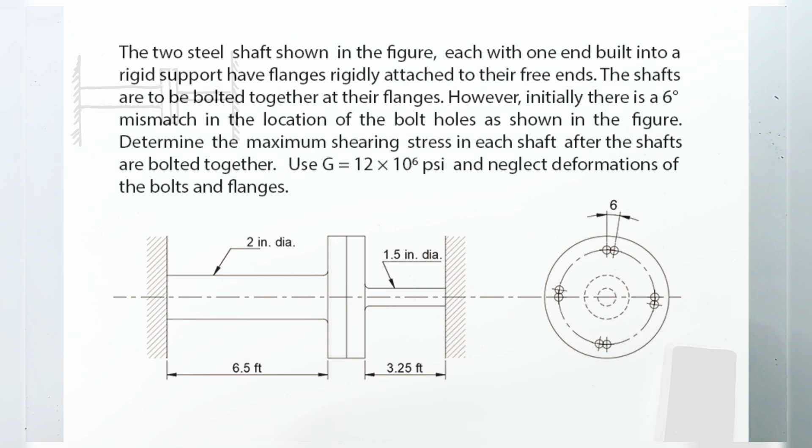So if we're going to bolt these two shafts together, then they have to be twisted in opposite directions so that the holes will match and we can insert the bolts. Because of this twisting, there will be torque developed in the shaft, and it will be resisted by the bolts.

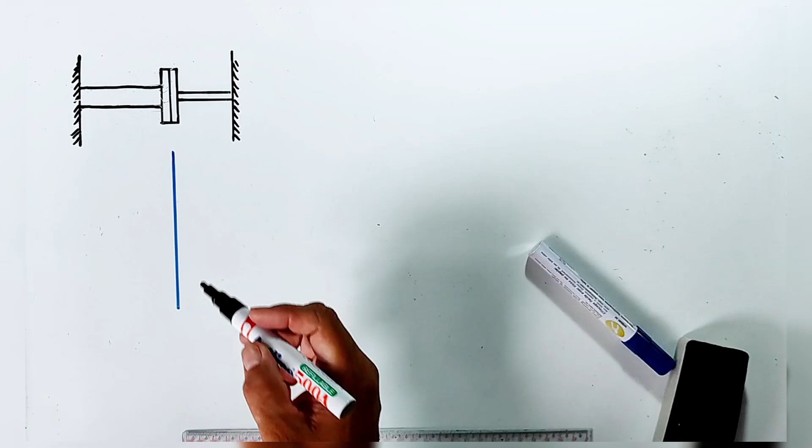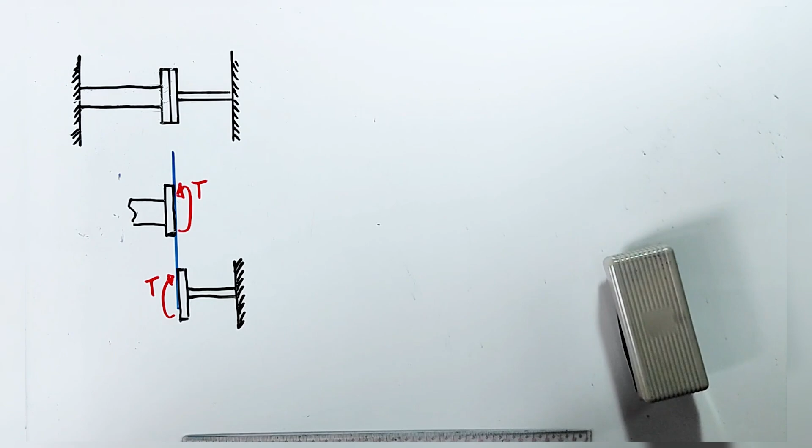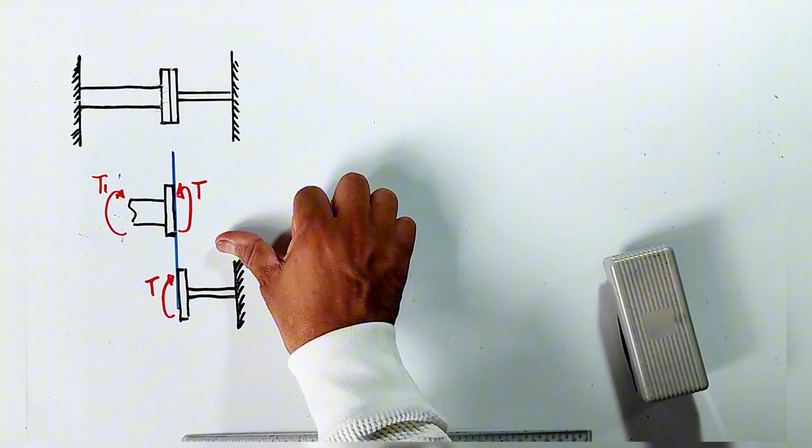Okay, if we are going to draw the free body diagram of each shaft, there will be a torque to be resisted by the bolts. Let's call this torque T, and that torque T is the same here. If we cut a section here, the torque will be resisted by the shaft. Let's call this shaft 1, with resisting torque T sub 1. If we do the same on the right side and cut a section there, there's a resisting torque T sub 2. So from this, we can say T sub 1 equals T, and T equals T sub 2. Therefore, T sub 1 equals T sub 2 equals T. So we'll just use T as the resisting torque for each shaft.

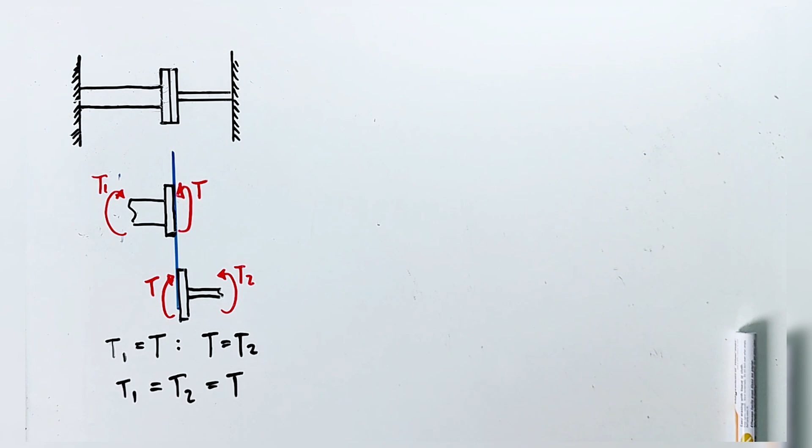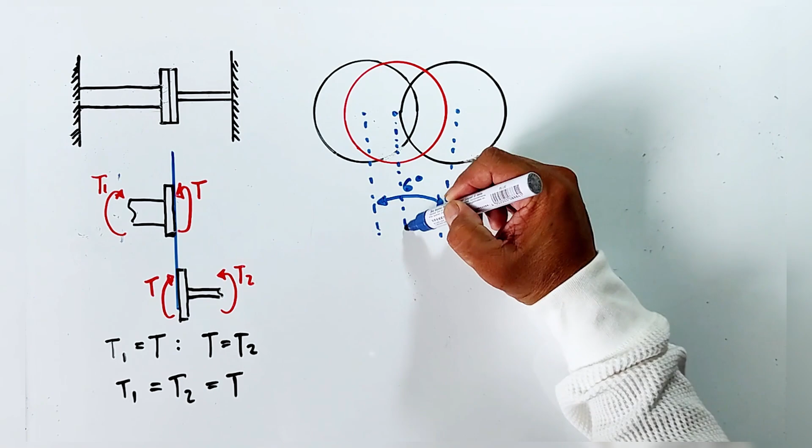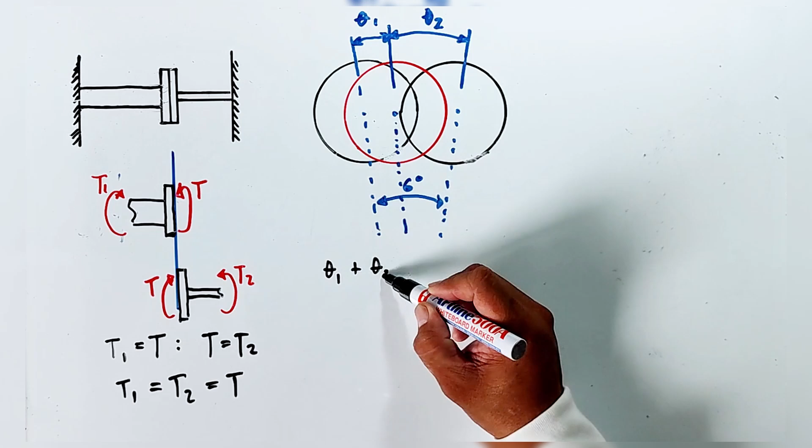Now considering the twisting of the shaft, let's say these are the bolt holes, not the shaft, these are the bolt holes. So there's a 6-degree mismatch. After being bolted, let's say the red one is the final position of the two bolt holes. So the movement from here to here will be the angle of twist of one of the shafts. Let's say this is the angle of twist for the second shaft, while this one is the angle of twist of the first shaft. So from the illustration, we can say that the angle of twist of the left shaft plus the angle of twist of the right shaft is equal to 6 degrees.

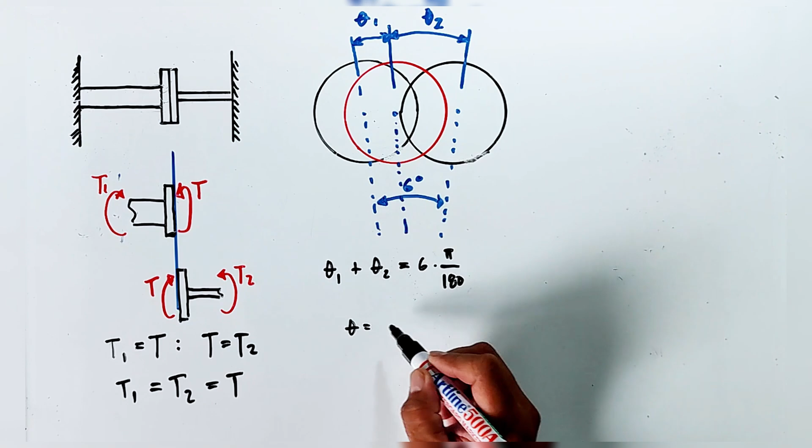And to change that to radians, we'll multiply by pi over 180. So from the formula, angle of twist equals TL over JG.

For theta 1, that will be T times L1, which is 6.5 feet. Converting that to inches, we multiply by 12, divided by pi times d to the fourth over 32 for J, pi times diameter, which is 2 to the fourth power, divided by 32, divided by 12 times 10 to the 6. Plus theta 2, again we'll just use T because they're equal, T times the length of 3.25 times 12, divided by pi d to the fourth, that's 1.5 to the fourth, over 32, divided by 12 times 10 to the 6, equals 6 pi over 180, which is pi over 30.

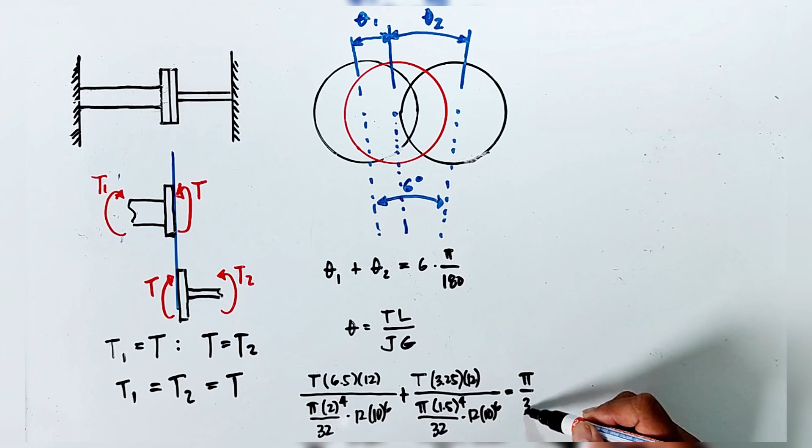So T equals pi over 30 divided by the quantity: the first term is 6.5 times 12, divided by pi, divided by the diameter to the fourth power, that's 2 to the fourth power, divided by 12 times 10 to the 6, then multiplied by 32. Plus the second term is 3.25, converted to inches, times 12, divided by J, that's pi, divided by 1.5 to the fourth power, divided by G, 12 times 10 to the 6, times 32.

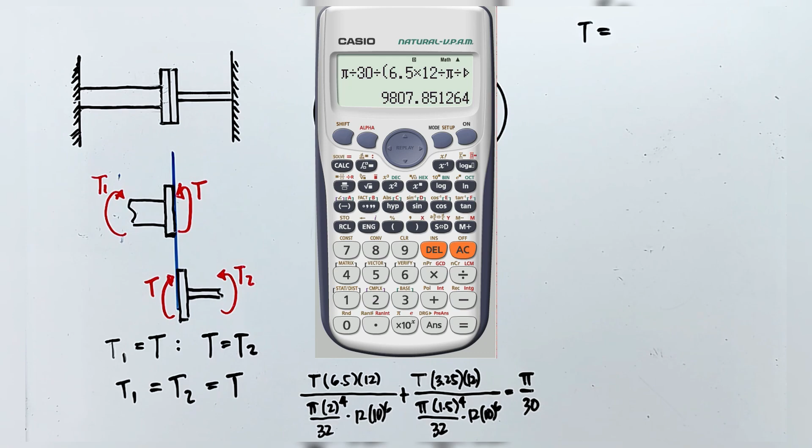Close parenthesis, equals, T is 9,807.25 pounds. So now we are going to solve the shearing stress in each of the shafts.

Although they have the same torque, since they have different diameters, and shearing stress, which is 16T over pi d cubed, is a function of the diameter, and they have different diameters, we will expect different values for the shearing stress.

So for the shearing stress of the left shaft, shearing stress 1 equals 16 times T, 9807.25, divided by pi times its diameter 2 cubed. So that's 16 times 9807.25, divided by pi, divided by 2 cubed, equals 6,243 psi.

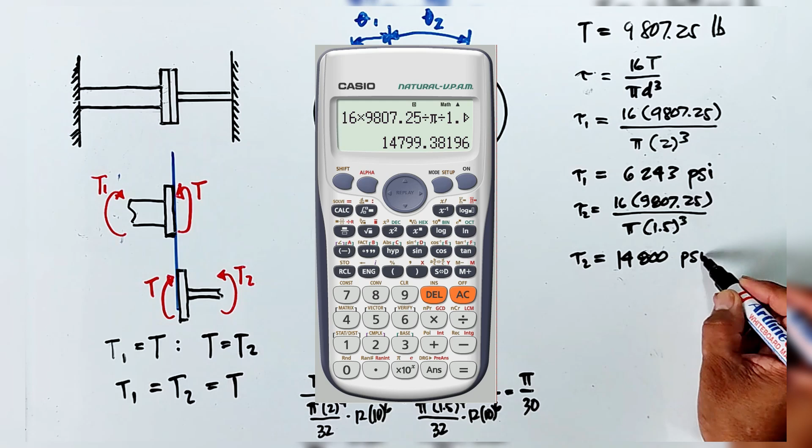For the right side, that's 16 times the same torque, divided by pi, with a different diameter now, 1.5 cubed. So we have the shearing stress for the right side: 16 times 9,807.25, divided by pi, divided by 1.5 cubed, equals 14,800 psi. So these are our answers.